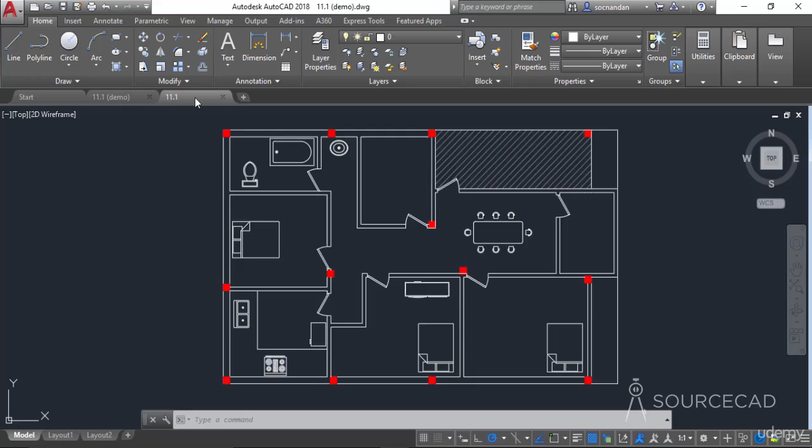Now making a block is quite simple, and to explain it, I'll go to this drawing. Here we have a simple geometry which is made with line, circle and arcs.

Now in order to convert this into a block, you can use the command equivalent of create block, which is B, or you can select this create block tool from the block panel of home tab. So I'll click here, and now this block definition window will pop up.

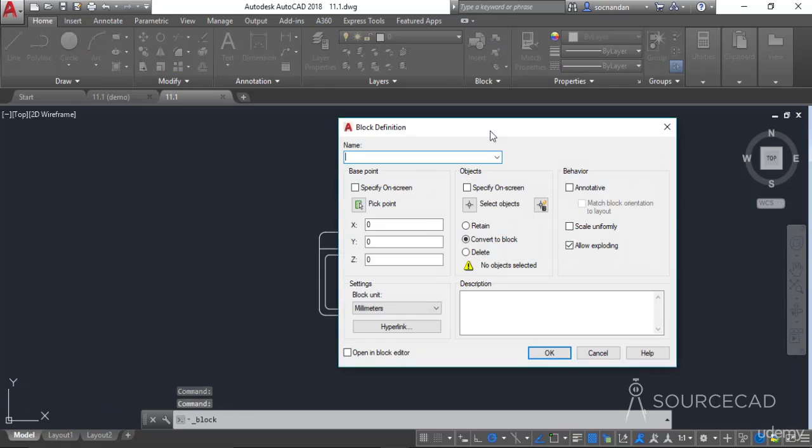First you need to specify the name of the block. So I'll name it as sink, and now select the pick point. I'll click on this pick point, and now I'll click on this top point.

But in this case, I'm not able to see any object snap marker. So I'll go to the status bar and select this object snap option. Alternatively, you can also select the object snap by pressing the F3 key.

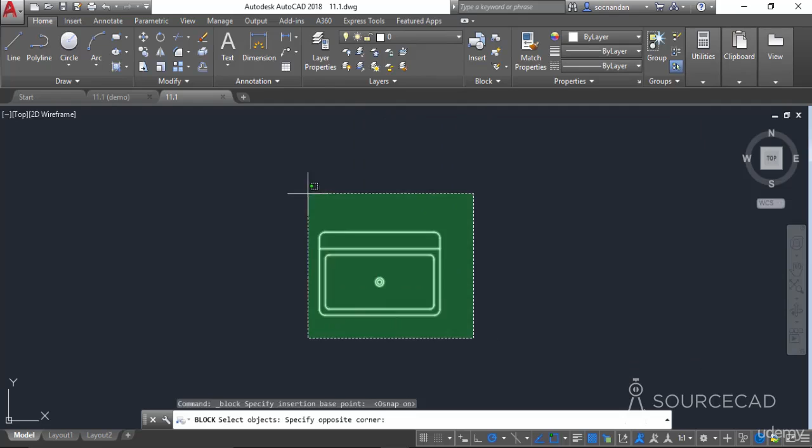Now click on this point, and here we have the coordinates of that point, added here. Now click on select objects and select all of these objects and press enter. Now you can see that we have 19 objects selected, and all of them are in our selection set for the block. Now we have these three radio buttons.

For the first case, I'll simply select this convert to block option, and also I'll keep annotative and scale uniformly unchecked. We'll look into these options in a moment, and I'll keep this allow exploding option checked. Now with these settings, click on OK.

And here we have this block. Now when I move my cursor to this object, you'll see this block reference on the tooltip. That simply indicates that this object is now converted into a block. It's no longer a set of geometries.

And when I click on it, you'll see that the complete geometry will be selected with a single grip, which is at the base point.

Also, when you go to this block panel, you'll see this small arrow right under this insert option. When you click on it, you'll see a replica of the block. Here we have the sink block, and now it is added to our current drawing, 11.1.dwg file. It has been added there, and this is simply a copy or a reference of this original block.

So if you want to insert it, simply click on it and insert it.

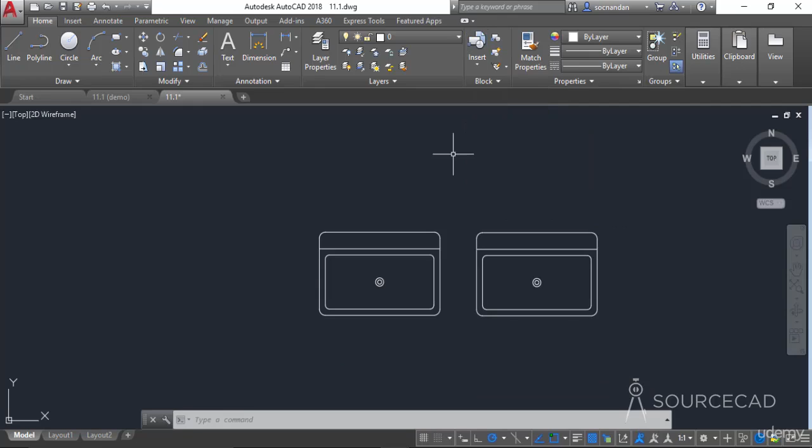Both of these are references of the original block which is stored here. Now let's press Ctrl Z a couple of times to get back to the original drawing. And here we have it. Now it's no longer a block. Once again, I'll convert it into a block with slightly different properties.

I'll go to this create block and give it a name, so I'll name it sink once again. Select the pick point, which is the same pick point on the top side here, and select objects. I'll select all of these objects. Now in this case, I'll select a different radio button. In the previous case, we selected convert to block, but now I'll select retain, and keep the rest of the options unchanged, and click OK.

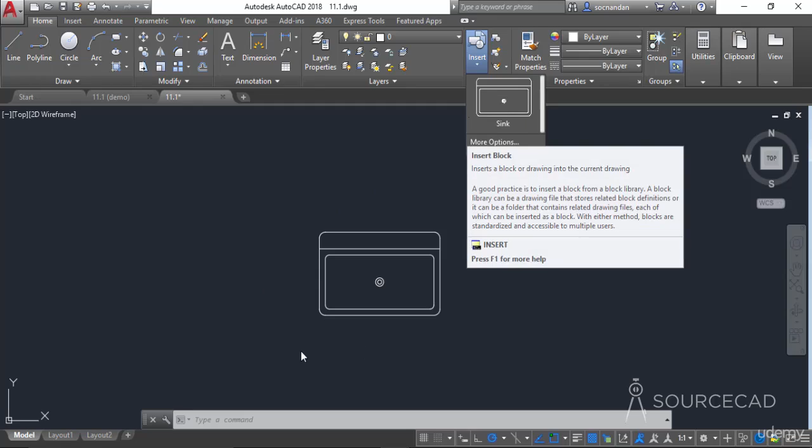Now when you move your cursor to this object, you'll notice that it's still a simple object. It has not been converted into a block, but we have a copy of that object here. We have the block added in our drawing, although the drawing on the screen has not been converted. That's because we selected the retain option while creating the block, and that's why the object on the screen has been retained into its original form. It has not been converted, but a copy of that has been added as a block here.

Similarly, when you select the delete option while creating the block, the object on your screen will be deleted, but a copy of that object will be added as a block. So I'll close this block definition, and now I'll press Ctrl Z a couple of times to get back to the original drawing.

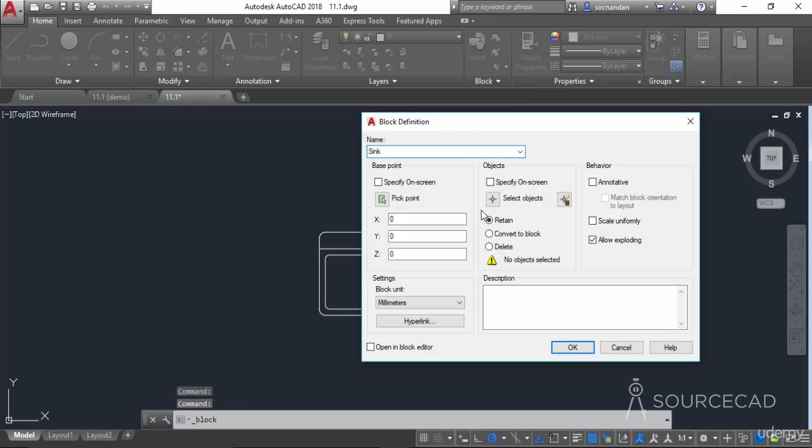Now let's have a look at some of the options available in the create block window. For that, I'll once again create the block. So go to this create block and give it a name, again sink. Pick point, which is the same pick point, and I'll select the delete option and select all of these objects and press enter.

Now here we have some options like annotative, scale uniformly, and allow exploding. When you click on this annotative option, the block will become annotative, and we'll learn more about annotative behavior in upcoming modules. For now, I'll keep it unchecked. Here we have an option of scale uniformly. When you click on this option, you'll be able to insert the block in a drawing with uniform scale in X, Y, and Z direction. So when this checkbox is selected, you won't be able to change the scale in different directions. All of the directions will have the same scale.

Also we have an option of allow exploding. When you select this option, you'll have the option of converting this block into simple geometry by exploding it. I'll keep this checked, but scale uniformly I'll uncheck. Also we have an option of block unit, which is set to mm, and in most cases it will be the same as the unit inside your drawing template. So I recommend keeping its unit unchanged and the same as the drawing template unit, to avoid confusion. Now click on OK.

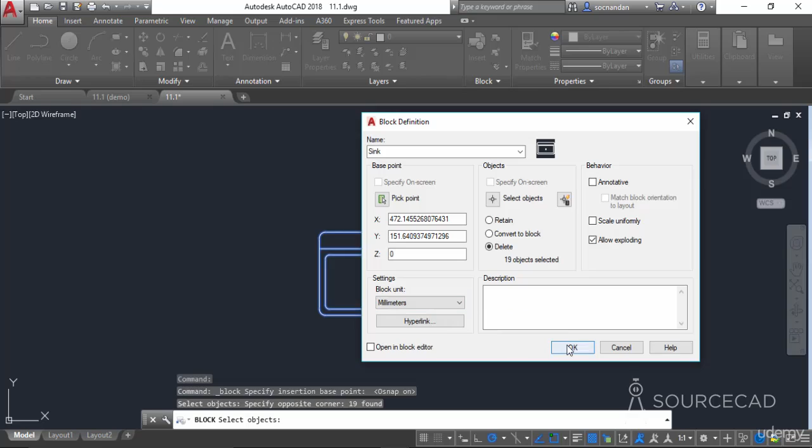Since we selected the delete option, the block has been deleted from the drawing area, but we have a reference here. The original block has been added and you can insert its reference.